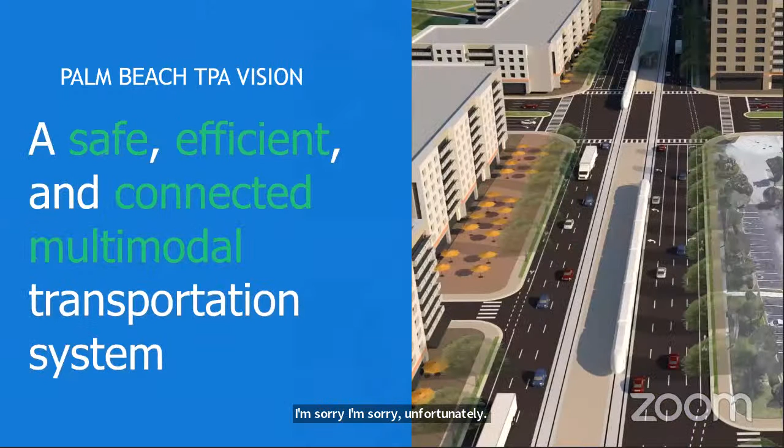So you're ready to go? Yes, we are. Okay.

Good morning. I would like to call to order the December 1st, 2021 Technical Advisory Committee meeting. The Palm Beach TPA is conducting this meeting both in person and virtually using the Zoom webinar platform. Instructions to join the virtual meeting as well as contact information for assistance are provided in the published meeting agenda.

Staff, please call the roll so that we can establish a quorum. I'm switching microphones, maybe that'll help because I don't hear the echo anymore. At this time, I'm only asking those TAC members attending in person to respond by saying here when I call your name. I want to remind you to unmute your microphones. There's a button on the base, and when the light on top is red, it means you're live and the virtual attendees can hear you.

Alternates, please also state your name if you are attending on behalf of a TAC representative. Jim Bell, Maria Tahara. Here. Gary Dunmeyer. Here. Richard Pereira. Here. Kenny Wilson. Here. Thomas Driscoll. Jamie Brown. Natalie Crowley. Here. Kim Glass Castro. On behalf of Kim. Thank you.

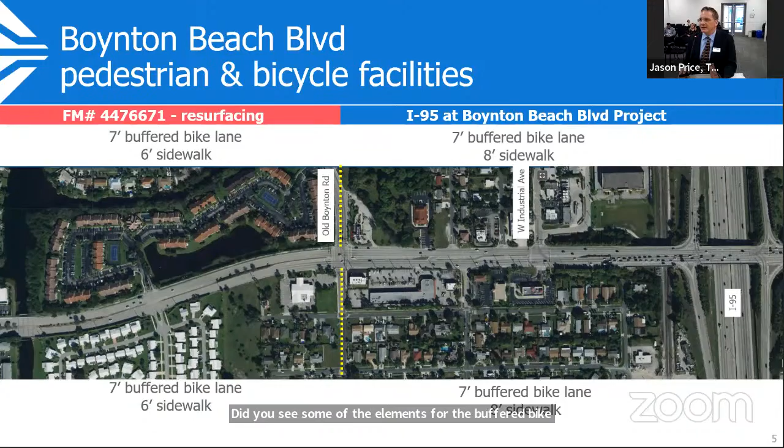I have a few slides to show exactly how the project lays out with the other two projects to show the continuity. From the west, there's a resurfacing project. The project in the middle, I-95 at Boynton Beach Boulevard, is the one being discussed today, with elements for the buffered bike lane and sidewalk trying to maintain continuity with the project to the west. Going further east, there's another project, a shared use path project. This project is in between, and they found a way to harmonize it and establish continuous facilities through Boynton Beach Boulevard.

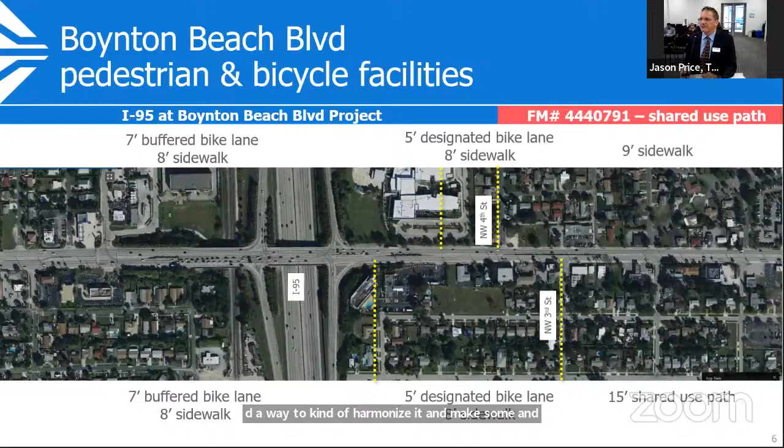So with that, those are the two projects. If there's any questions, I can answer them at this time.

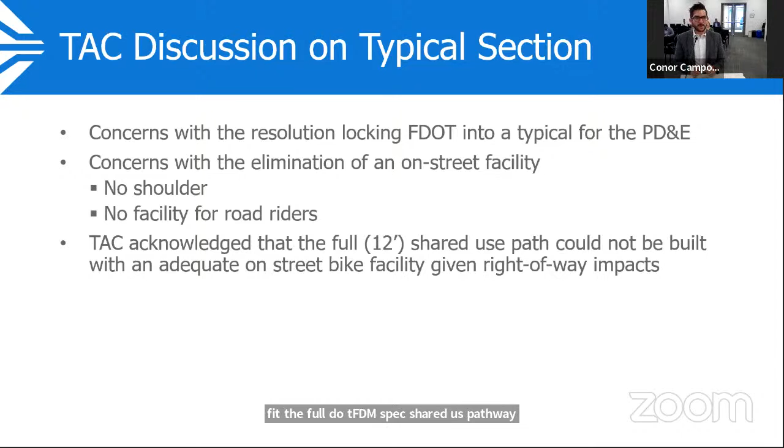During our TAC discussion, there was some concern with the resolution itself sort of locking DOT into a typical section for a PD&E study, not allowing them flexibility to develop the best option possible. There was also concern with eliminating the on-street bike facility, mainly because that facility also creates a shoulder and provides an option for riders who prefer to ride on the roadway. The TAC did acknowledge during the meeting that it's unlikely to fit the full DOT FDM spec shared use pathway along with an on-street bike facility, given the right-of-way impacts.

In addition to the typical section, there were two other comments. One was regarding the displaced left turns. There was some support for that during the TAC discussion.

Another item heavily discussed was the inclusion of shade trees in the swale, if possible. We did speak with FDOT regarding this. The landscaping can be part of a future project, but TPA staff will have to work with DOT more regarding funding options for that future project. It will have to be a separate project in the future, but it is still an option, so we're going to be exploring that.

So finally, that leaves us with the resolution language, which I have on the screen here. We worked with DOT quite a bit on this resolution language, and we think it provides the flexibility everybody was looking for, especially regarding the typical section itself, as well as not locking DOT into an intersection typical for the Jog Road intersection. So with that, I would like to move to recommend the new updated resolution language. Thank you.

Okay, staff, are there any public comments on this item? No, Madam Chair.

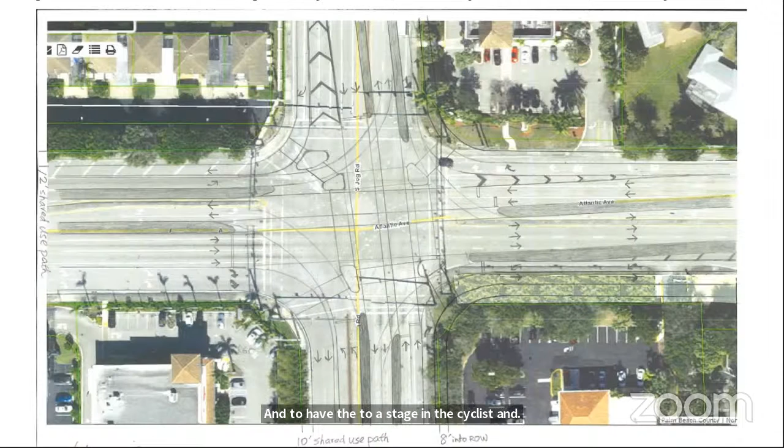The concept of this design is that the pedestrian and cyclist will be moved through the shared use path, 10 to 12 feet wide, to get through the intersection, as opposed to the current 12-foot crosswalk. The refuge island within the intersection is much bigger, staging cyclists and pedestrians safely onto the refuge island. So compared to existing intersections, the pedestrian crossing safety has a full benefit compared to traditional design as well.

So we can discuss this in a separate meeting. Yeah, I think that's a good idea. We could probably talk offline with DOT and TPA and with you to figure that out. I think as of right now, the resolution doesn't necessarily preclude a design like this. It's mainly focused on steering away from designs that have severe impacts to right of way and the safety of pedestrians. So I think we could probably move that conversation offline and discuss a little bit more. Okay, thank you.

Yep, thank you. Kevin, I think you have your card raised. Yeah, so this motion to adopt this, it still sounds like you've got a lot of details to work out. So this is just supporting the project with the details to be developed at some point in the future.

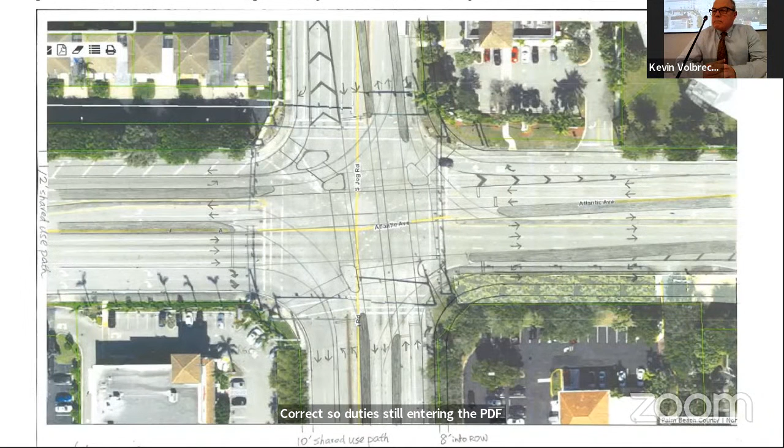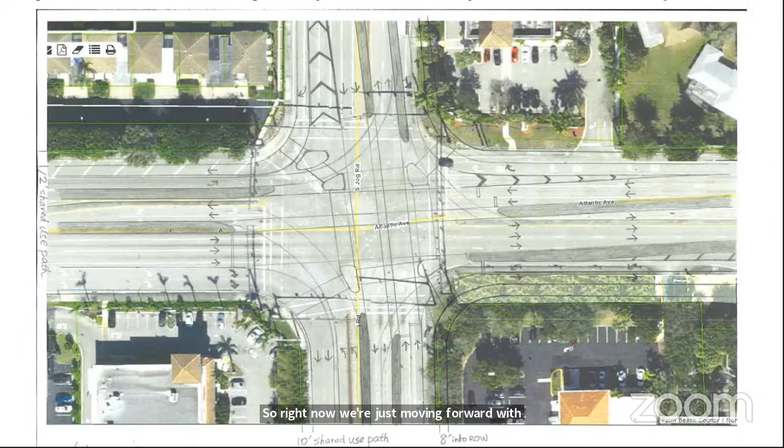Correct. DOT is still entering the PD&E study, so they're still going to be working through some designs of the intersection as well as the typical section. Right now we're just moving forward with supporting it. We wanted to honor the board's direction and steer away from designs that would severely impact right of way, typically or specifically in the northwest section. One of the concepts with the partially displaced left had a lot of impacts to both access as well as impacts to single family homes in that northwest section, so we wanted to steer away from that, but still allow DOT the flexibility to design the best typical and intersection design.

Okay, the other question I had was it talks about a typical section with sidewalks or shared use paths of at least 10 feet in width. Is that an acceptable dimension to be considered as a shared use path?

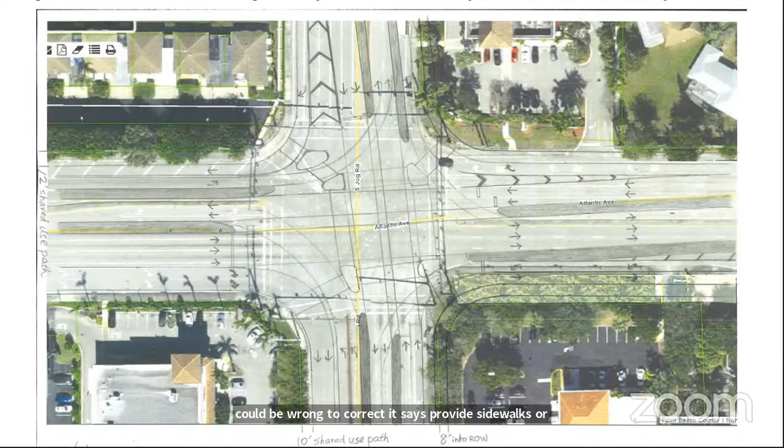So I believe the resolution says either a shared use path or a 10-foot wide sidewalk. I could be wrong, is that correct? It says provide sidewalks or shared use pathways of at least 10 feet in width. Correct. We worded it that way because the FDM has very specific guidelines for what a shared use pathway is. For the TPA, a 10-foot wide sidewalk could be considered a shared use pathway, but we wanted to keep that wording in there so that if it's a 10-foot sidewalk to DOT, we can still build it and cyclists can utilize it as an area in which they can feel safe to bike in.

You also mentioned the other gentleman in your responses that you were going to require them to have another 8 feet of right of way to be able to use that 10-foot shared use pathway. Can you elaborate on that a bit?

Yes, so based on the concept that was just up, that did not have any on-street bicycle facilities, it only had the 10-foot sidewalk. It was labeled as a shared use path, but in order for it to meet shared use path criteria, it would need to be 12 feet wide and have 4 foot clear in the front and back of that shared use path. So leaving the resolution saying 10 foot or 12 keeps that open, so that if we do use a 10-foot sidewalk, you can eliminate the 4 foot clear on each side, but you will still need a bicycle lane.

Okay, I don't think the resolution says that though, does it? It's open-ended. The purpose is that it provides sidewalks or shared use pathways of at least 10 feet in width. So it does not say anything about removal of the on-street bike lane. If you go with the 10-foot sidewalk, you will need the on-street bike lane. If you go with a shared use path, it'll have to have the 4 foot clear and be 12 feet in width.

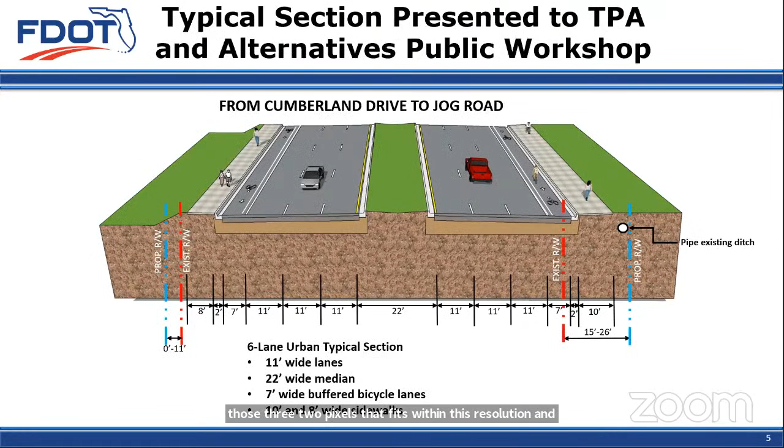Sure, good morning, I'm Rudy Gutmurray. What I would like to add is, in the presentation we did, the typical sections we presented do fit this resolution, right? So as a committee, you have those 3 typicals that fit within this resolution, and you have an option today: you can recommend one for the board's consideration. That's also a possibility, rather than coming back 2 or 3 months later. I would rather have you take a look at those typicals again that fit with this resolution, and potentially make a recommendation that could be carried to the board. That could be one of the options.

Because there's some significant differences between some of them and options 2 and some of the others, if we want, we can go over those 3 typicals that meet this language that you just saw and describe those, and maybe we can take a look at those if you want to make a recommendation today. I just want to make sure that would be okay. I mean, I'm okay with that.

That's not what is in the agenda. So as an advisory board to the board, we're making a recommendation from the technical side of the business. We've conducted an alternatives analysis, and we've developed these 3 typical sections. So that's what we're going forward to. Essentially, we will finish the analysis on those 3 typical sections.

We're still working with the Water Management District to try and minimize right of way along the canal side of this typical section, which would allow us maybe some flexibility there in what would ultimately be recommended. We will be going to a public hearing, and this will come before the public and to those who attend.

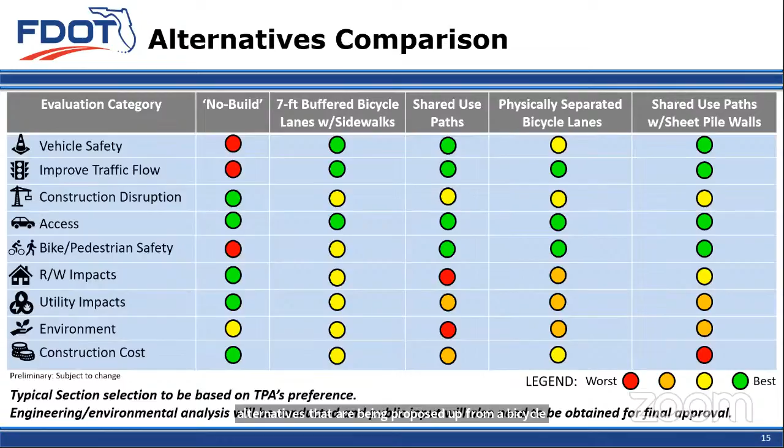That's fine. My other bigger question with regards to this one—and this is the big issue I have with the alternatives being proposed—from a bicycle pedestrian safety standpoint, we're saying that all 3 options, all 3 alternatives, are the same or similar, all have a green dot according to this alternatives comparison.

As I indicated in the meeting we had 2 months ago, I had a significant concern with any option that removes on-street bicycle lanes. There is a safety concern, because you're still going to have cyclists using the road, but now there's absolutely no place for them to go. So to indicate that an option which removes on-street bike lanes would have the same level of bicycle pedestrian safety as an option that actually provides on-street bicycle lanes—I have a disagreement there.

The second point is, if we're now saying that all those cyclists are going to be using this shared use path—several studies have shown that shared use paths in areas with a number of conflict points between cyclists and vehicles can actually result in an increase in accidents.

A few weeks ago I was in this general area. I decided to drive to this corridor because I hadn't been there in a while, and I just wanted to familiarize myself with it. There's some diversity in the corridor, not all areas are the same, but some sections have a multitude of curb cuts and driveways, with commercial plazas, supermarkets, cinemas, and things like that.

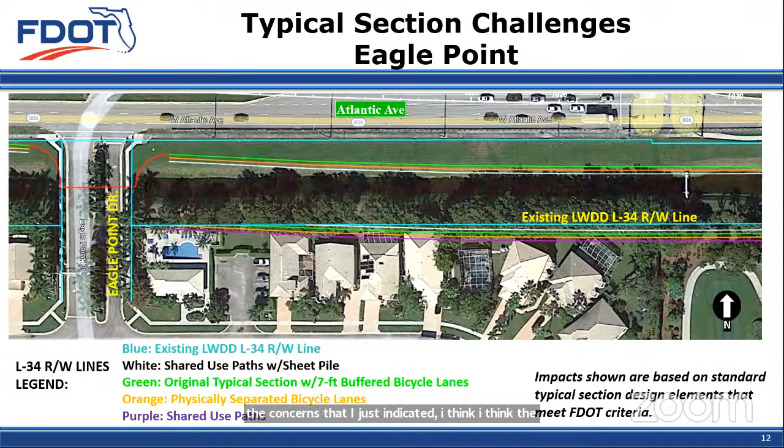I think it increases risk for cyclists — there's going to be cyclists riding on this road and now they won't have a facility at all. And second, if we're saying all of them should be riding on this other facility, that would be okay if there were an area with no conflicts with vehicles. But there are multiple conflict points, and that's why I wanted to drive the area — I'm familiar, there's quite a few. So that would create a less than safe situation for cyclists.

I respect your comments, and those are very valid comments. But still, we have to go forward with one alternative that you all recommend. So that's the guidance we're looking for, to move this project forward. We're already six to seven months delayed, so help us move forward and make this project, which is a priority for the county and the TPA, proceed to PD&E and final design and ultimately construction. That's what we're looking for.

I have another comment. Levi? Yes, thank you — how do you envision Palm Tran boarding and alighting passengers with the guardrail? We don't currently have service on Atlantic Avenue, but it is part of the 561 corridor, and we envision that in the future. So I'm curious how the mechanics of that would work.

At this typical section, I don't think we identified, unless something new is added, any existing or proposed transit routes along the corridor. In future, if you decide to do that, pockets could be implemented for buses to pull out if needed.

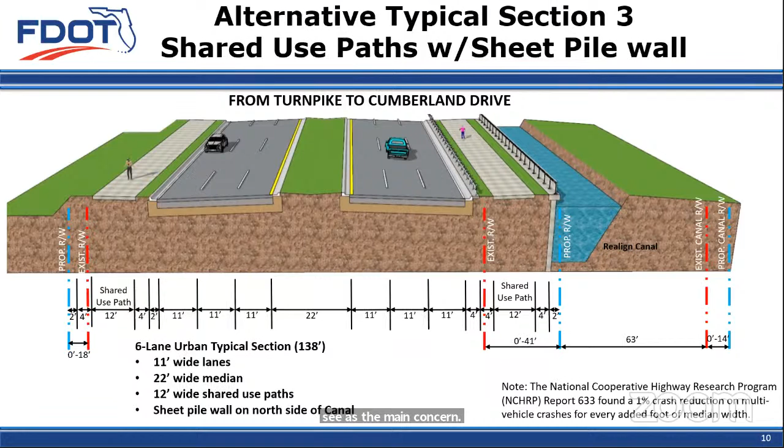I can see having an on-street biking facility in conjunction with a 10-foot sidewalk as having the least amount of right-of-way requirement. It is my preferred option. I'm not sure we're in a motion, but that would be the one I would support.

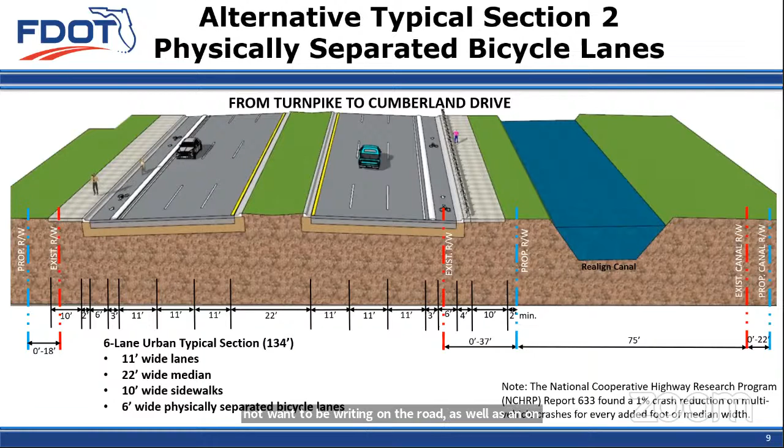Section 2 provides those two types of facilities: a 10-foot shared facility for pedestrians or cyclists who may not want to ride on the road, as well as an on-road facility, and it requires less right-of-way, 134 feet as opposed to 138. I think that would be the best option in this case, and that's what I would suggest we recommend if we're going that route.

Okay, thank you. Maria.

Yes, I would like to go back to the item in front of us, the resolution we are evaluating. It has three conditions. The first is to provide sidewalks or shared use paths of at least 10 feet in width. Is this supposed to be on both sides of the road?

Yes, that's correct. Should we then spell it out? I just feel more comfortable if it is spelled out. That's up to the TAC. I have no reservations about that. I would amend my motion to include that, because that's been a point of conflict in other projects. Okay, I will second that motion. Natalie is the second. That's fine.

The next one is: if feasible, without moving the construction start date or purchasing additional right of way, extend these facilities. I'm assuming these facilities pertain to the sidewalks or shared use pathways. Yes, we may want to spell it out.

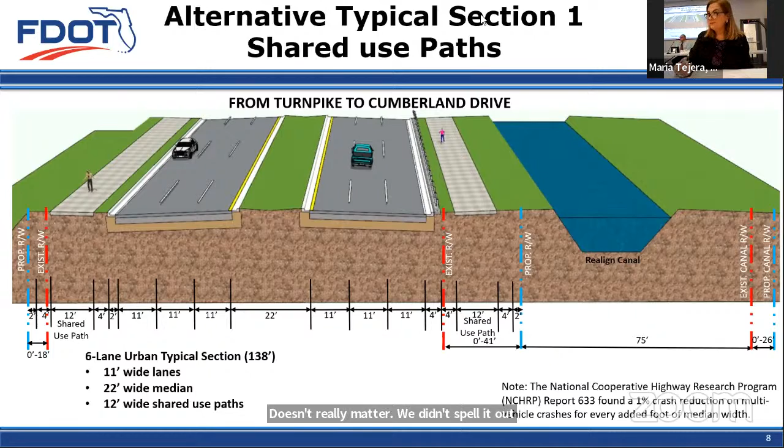I'm not sure, doesn't really matter. We didn't spell it out just because, well, we could probably clarify it a little bit more, but we didn't spell it out in there just because the first clause is a little bit open, again, to allow DOT that flexibility. But if you have a recommendation to help clarify that sentence.

You're clarifying it for the record. Okay, I feel, okay, just for further clarification, just a question. So by these facilities, if the option is to go with on-street bike lanes and off-road facilities, then these facilities would include both things, correct? Correct.

Again, well, we need it to be clear. Again, if feasible and if it fits in with those parameters, then yes, correct.

Maria? Okay, if that is the case, maybe we want to add in here that instead of 'extend these facilities,' maybe 'extend pedestrian and bicycle facilities.' That way it's 100% clear.

So the other projects, and I guess John, correct me if I'm wrong, they do include bike-ped facilities on those projects. The idea here is to make them consistent, if again feasible. So it would be, whatever concept is decided here, to extend those to those other projects that are already going on. One's already in design and the other one is, I guess, going through feasibility.

I'm not sure, but they're already in the process. So again, I do want to highlight that if feasible, we'd be extending those. But again, making it consistent if possible.

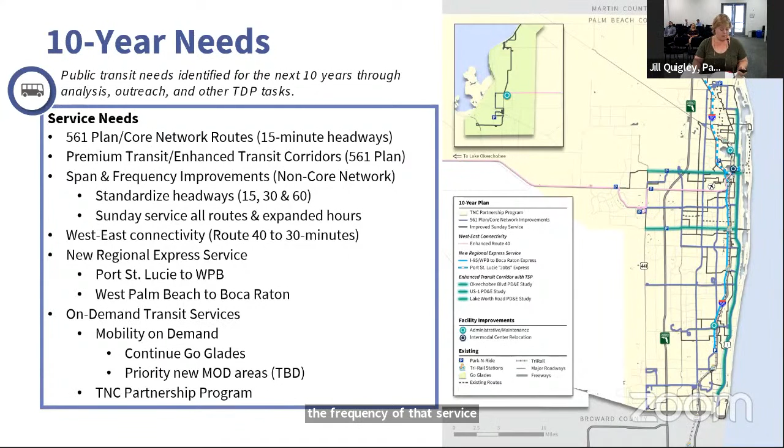So these needs are capital needs, policy needs, plans and studies, and technology needs. A couple of things to point out: Palm Tran was already working on a park and ride facility study, and the recommendation in the TDP is that as that study is finalized, those recommendations get put into the TDP moving forward.

I also wanted to point out the Wi-Fi enabled fleet. All of Palm Tran's fixed route buses currently have Wi-Fi. This is looking at adding Wi-Fi on the connection buses as well as the Go Glades service.

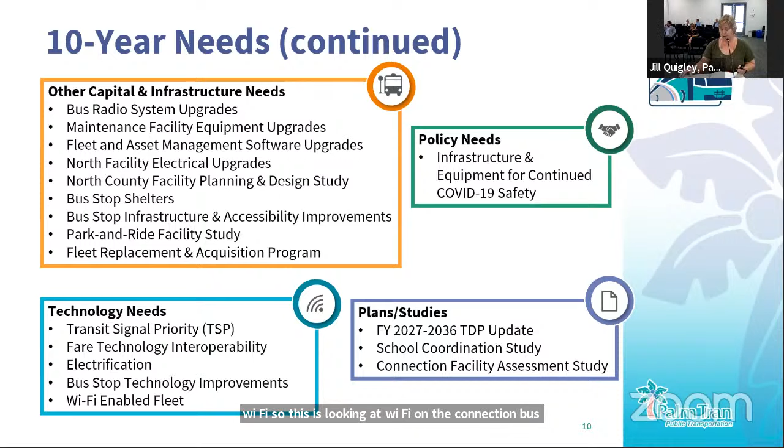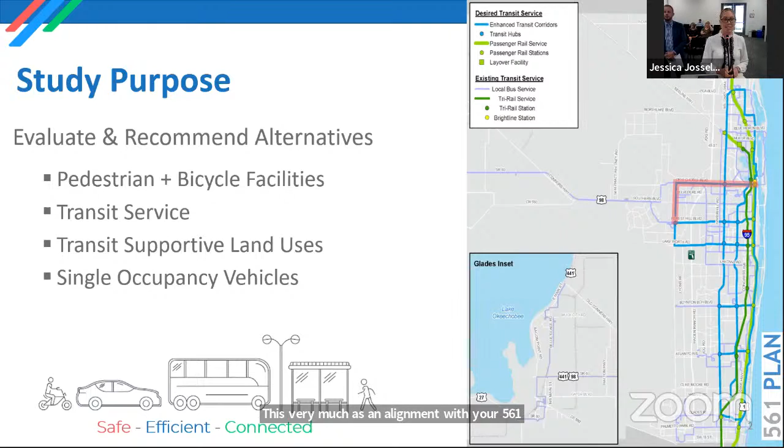This very much is in alignment with your 561 plan on creating a safe, efficient, and connected system throughout the county. Why Okeechobee and State Road 7? It's probably obvious to many of you in the room, but this corridor has many residents across it, looking at about 42,000 that could use a different type of system than what we have today. Also, there are a lot of jobs, 46,000 jobs in this area highlighted on the map. The limits are on State Road 7, starting at the Wellington Mall and heading north to Okeechobee and going all the way east into downtown West Palm.

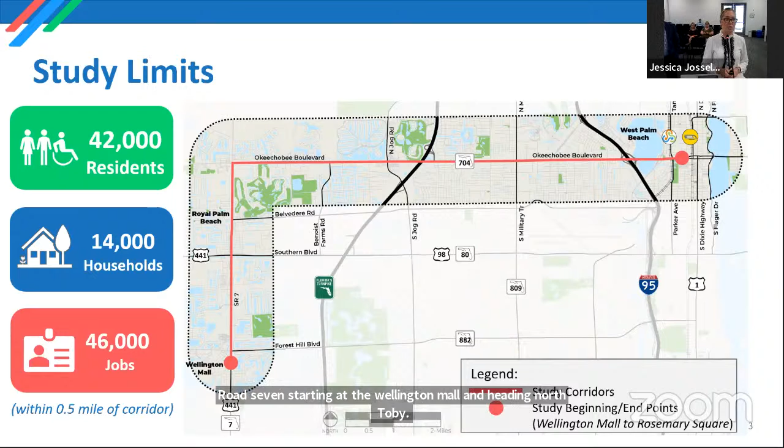So with that, I'm going to pass it to Stuart, who's going to, with me, walk through some of the existing conditions that we found in the corridor.

Jess and I are really going to tag team this presentation, going back and forth because we are working very closely and integrating our teams together on the project. Crash data along the project corridor show that multimodal safety is an issue worthy of being addressed immediately. The heat map shown on this slide is from the TPA's pedestrian and bicycle safety study. It shows that the portion of the study corridor between the Turnpike and roughly Congress is one of the worst areas within the county for pedestrian crashes.

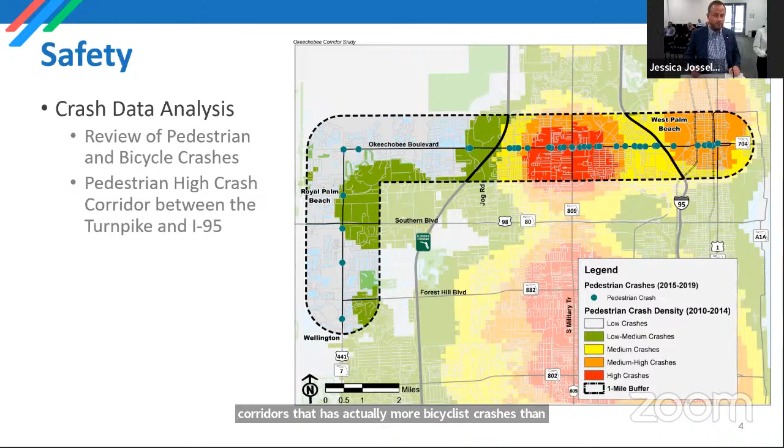The TPA's Vision Zero plan found a very similar outcome, and a review of crash data that we are conducting as part of the current Okeechobee Boulevard and State Road 7 study, data from Signal 4 Analytics show that this corridor is one of the few corridors that has actually more bicyclist crashes than it does pedestrian crashes, although the bicyclist crashes are more spread out than the pedestrian crashes are, with pedestrian crashes being more focused in that area between the Turnpike and Congress.

Obviously, the existing transit conditions are a big part of our analysis, and we've been able to build from the work that Palm Tran conducted as part of an Okeechobee Boulevard existing conditions assessment from January of 2021. This corridor, as it's drawn, is very important as it links two transit hubs, from the mall at Wellington Green to the West Palm Beach Intermodal Center. Route 43 is the West Palm Beach crosstown route, and that's a big part of our existing conditions assessment.

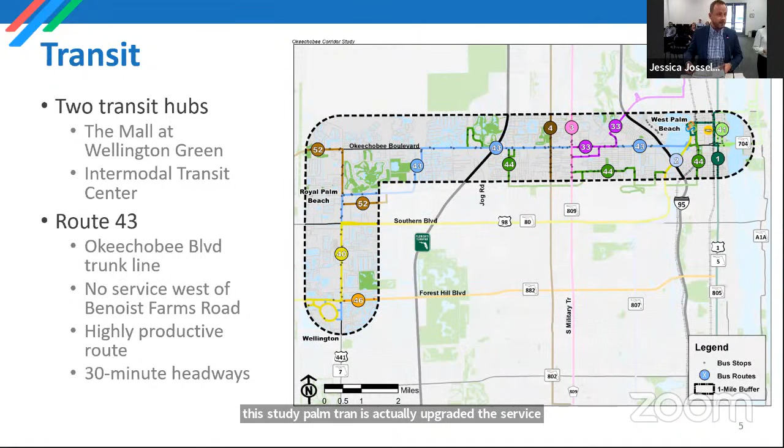It is not exactly analogous to the study corridor. There are portions of Okeechobee Boulevard that Route 43 does not serve. However, it is known to be one of Palm Tran's most highly productive routes in most of the monthly ridership assessments. So productive that during the course of this study, Palm Tran has actually upgraded the service on Route 43 to now 20-minute headways instead of the 30 that it used to be.

Another important piece that we were able to, working with the TPA, incorporate into this corridor study that you don't often see in transportation studies is the impact on health—how the decisions we make in infrastructure impact the health of the community. So we wanted to make sure we showed under this existing conditions analysis, our assessment looking at data in terms of health disparities, the health conditions of the population and communities within the corridor.

And then also looking at an overall social vulnerability index. The social vulnerability index takes into account communities' makeup in terms of housing and transportation costs, race, ethnicity, and language, socioeconomic status, and also household composition.

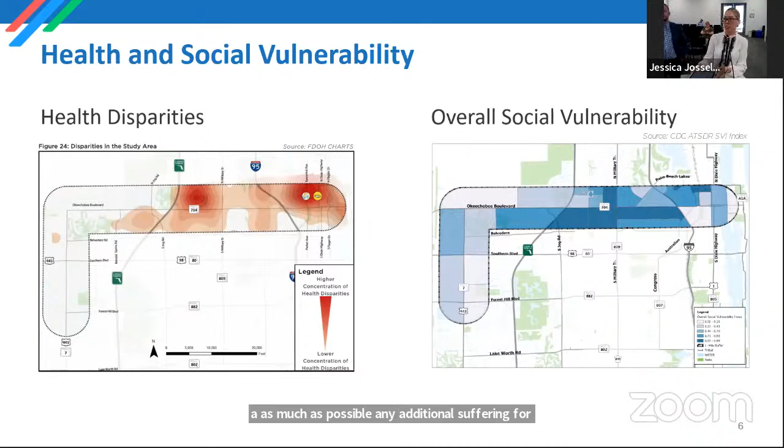So what we intend to do with this existing data, and you can see where the vulnerability lies within this corridor, is working with Stuart and his team and the TPA to assess how the decisions we make looking at the different transportation alternatives impact the most vulnerable in the communities. We'd like to try to eliminate or alleviate as much as possible any additional suffering for communities that already are at a potential disadvantage through the corridor.

Before we get into the alternatives, we'll walk through the existing conditions analysis, but for those that don't do corridor studies often, I wanted to walk through the different components. We've already alluded to some of this.

A major component of this study is the land use and economic development analysis. I'll be giving a bit of an example later in the presentation of what we mean by that and how it plays into our decision-making in this study.

Stuart walked you through the transit analysis under existing conditions, but he will also be walking you through future conditions and evaluation of alternatives. Roadway analysis was an equally important component of this study, knowing that the roadway makes up all the different modes, so we want to make sure we capture that in our analysis.

As I just mentioned, the health impact assessment is an important study component in how we're impacting health in our decisions. And very big throughout the whole project is public and stakeholder engagement. I want to thank many of you on this committee who have been involved in this process. We've had stakeholder interviews, a technical committee, and workshops. We've already held one that I'm going to walk through, and we have one coming up as well.

The public workshop we held ran from August 19th through November 12th. It was in person on the 19th and then virtual through November 12th. This first workshop focused on engaging with the community on what they observe and the issues and opportunities they find, from Wellington Mall all the way to downtown West Palm. We had over 40 people in person, and with the pandemic going on, we had safety measures and protocols in place, but it was great to see 40 or so people visit.

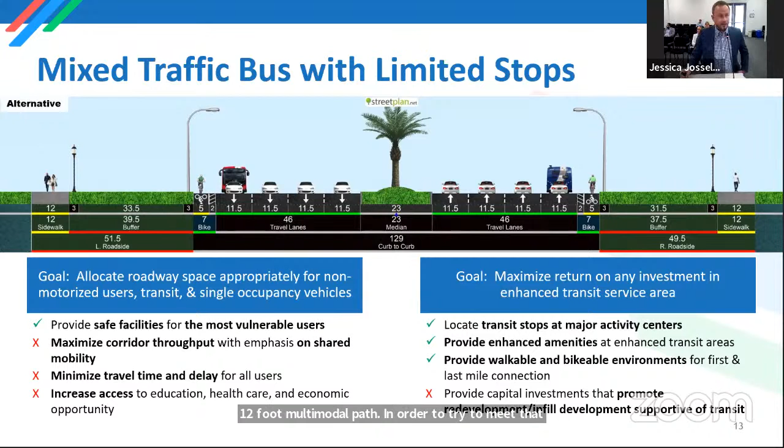While this addresses providing safe facilities for vulnerable users and having the ability to provide amenities at transit stops and major activity centers, it doesn't address some of the other evaluation criteria. One thing you'll notice is we've provided a tweak in the travel lane widths here to accomplish a buffered bicycle lane along the corridor, and also a 12-foot multimodal path on both sides of the roadway. That's common in each of the build alternatives: reconstructing the existing 6-foot sidewalk into a 12-foot multimodal path to meet the goal of providing safe and separated facilities for multimodal travelers on the corridor.

Alternative 3 is our Business Access and Transit, or BAT lanes alternative. This is a roadway configuration where transit vehicles would have preferential use of the outside lane. Use of the outside lane could also include people making turns from the corridor, hence accessing businesses - that's where the BA in BAT lane comes from. A lot of the corridor has dedicated right turn lanes, so in that configuration, the right lane would be used for merging across the BAT lane. But in more constrained areas, particularly east of the turnpike, that BAT lane would be crucial for allowing motorists to turn right onto side streets or into businesses. This also includes a buffered bike lane, as well as 12-foot multimodal paths on both sides of the roadway.

The next 3 alternatives are dedicated lane alternatives. The first is a curbside dedicated bus rapid transit lane, where transit has exclusive, rather than just preferential, access to the right turn lane - this would be a lane repurposing alternative. It meets most of the criteria we're evaluating, with the exception of minimizing travel time and delay for all users. So although it's faster for transit users, it comes with about a 15 to 20% additional travel time for motorists, because the lanes would go from 8 lanes to 6 lanes from the perspective of single occupant vehicles.

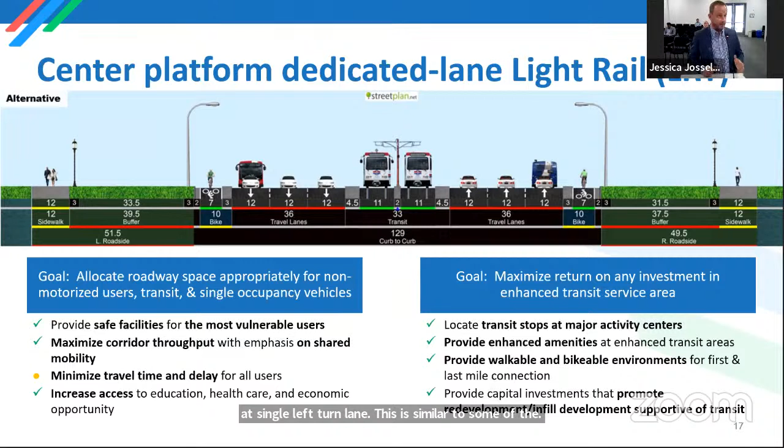Alternative 6 is similar, except we're looking at light rail transit instead of bus rapid transit, one of two rail options we're looking at. The geometry is similar, except the transit technology is different. One thing to note about these two center platform alternatives, in addition to a reduction in through lanes from 8 to 6, there would be impacts to signal operations. Likely some intersections that currently have dual left turn lanes would be redesigned as single unless the right of way were to allow them to still have two left turn lanes. That's probably true more in the western part of the corridor, but in the eastern part we'd likely be looking at single left turn lanes. This is similar to some of the peer facilities we're reviewing from around the country that have implemented center platform transit, either bus rapid or light rail.

Then the final alternative is elevated grade separated LRT. This is the only one that meets all of the evaluation criteria, although it does come with additional construction costs and some additional time for implementation that would be required. It's by far the highest level of investment.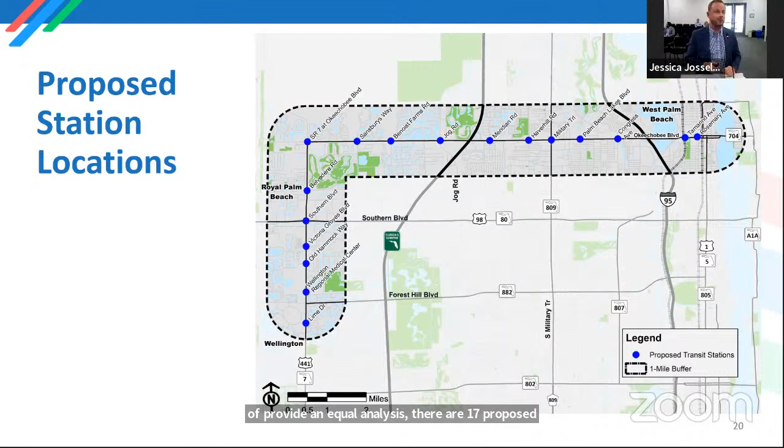The proposed station locations have been kept constant for evaluation and ridership purposes to provide an equal analysis. There are 17 proposed station locations along the 13.5 mile journey of the corridor from Wellington to downtown West Palm.

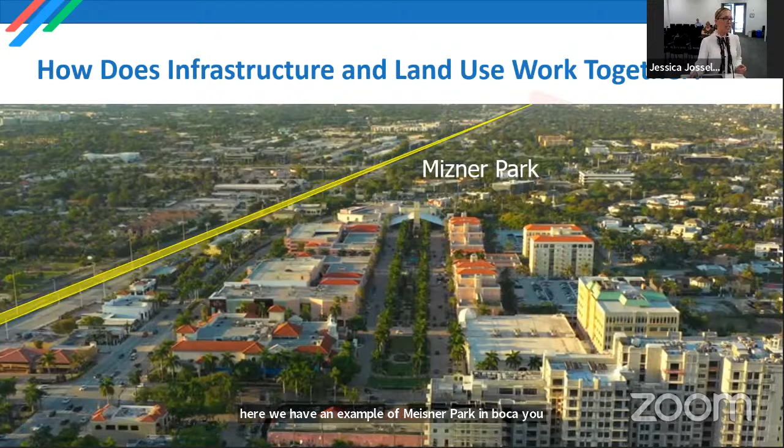It's a very important piece of this corridor study, especially given the transit element. So here we have an example of Mizner Park in Boca. You see the adjacent rail and the new Brightline station at a $46 million investment, expected to open in 2022. We thought this was a good example to share because it really shows what you do with your land can bring economic incentives to the municipality and county.

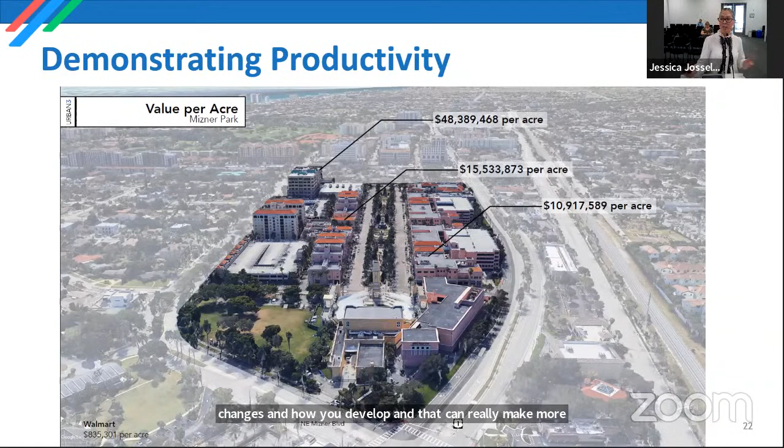So here we look at it in a different way and look at value per acre of Mizner. We have a couple of callouts here of the value per acre ranging from 48 million to almost 11 million. In the bottom left, it's hard to see, but in comparison, Walmart is under $1 million per acre. So as you can see, your value per acre really changes based on how you develop, and that can create more opportunities for a city or county.

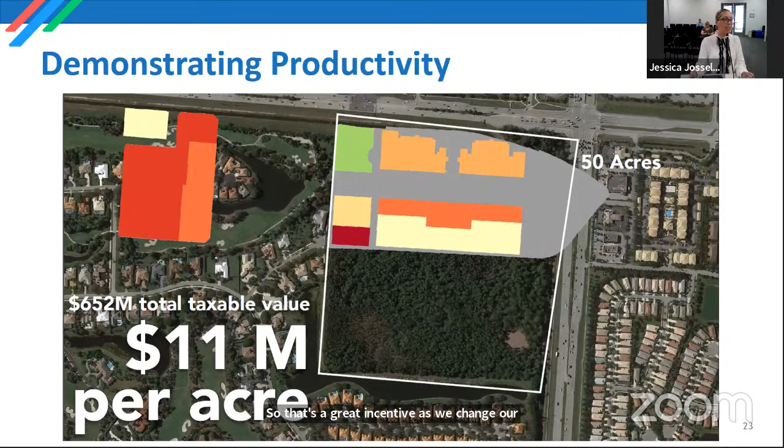Now in the future, there's an overlay for this area to be mixed use. So by taking this Mizner example and putting it here, you could have a value of about 11 million per acre. That's a great incentive as we change our transportation and redevelopment comes—it really can provide opportunities for the jurisdiction in the area.

So now that land use piece is completed. Before going to next steps, I wanted to share that we do have a land use and economic development group that we're working with. If you want more detail on that, we're happy to share those meeting notes and findings with you.

In terms of next steps and closing our presentation today, we are going to continue moving forward with the technical analysis on the transit and roadway pieces that Stuart walked through. We're also moving forward on the health impact assessment, figuring out how to best incorporate that into the decision-making process, and continuing the land use assessment as we get closer to a preferred alternative—looking specifically at opportunities for low, medium, and high potential redevelopment along the stations.

We have more meetings occurring in January and February with the steering committee and the land use and health groups. But most importantly to this group, other than the upcoming workshop, we will be coming in March with final recommendations. Stuart walked through a lot of alternatives, so how we narrow down to a preferred alternative and what that looks like will be coming to you and your board in March. We'll be looking for an action at that time.

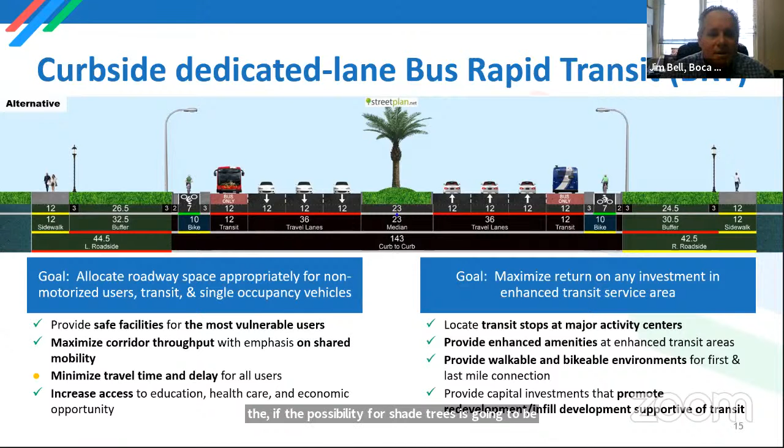Yes, trying to get my video to work. I was just wondering if shade trees could be an option in the alternatives. There are transit stops and shelters out there currently, but a lot of them are just stops with no shade for passengers that want to ride transit. I think this would also help the goal of improving the health index that was mentioned earlier, and the heat factors, since South Florida heat is getting worse. So I wondered if there's any consideration for shade trees in the swales, if we can do that. Thank you.

Yes, and we have gotten that feedback through the health impact assessment phase of the project as well. It's likely that could be incorporated during the design phase, specific to the enhanced station areas for any of the transit options, but in particular a BRT or LRT option would likely have the level of investment to provide either artificial or natural forms of shade around the transit stops.

Okay, I'm sorry, who was the last? Mo? Yeah, thank you. I hear you, and I know it's too late, so I'm not going to be talking about all of my points, I have too many of them, but I know the design team and the research team have heard my opinion on this before.